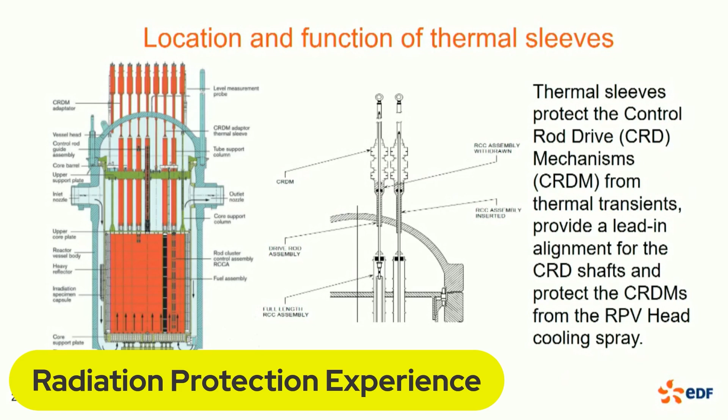So for your benefit and for mine, what is a thermal sleeve? This is a schematic of a standard PWR. Sizewell is an American-designed Westinghouse 4-loop PWR.

The thermal sleeves sit just at the top here, these funnel-shaped objects. They provide a lead-in during reactor reassembly for the control rod drive shafts, and they protect the control rod drive mechanisms from thermal transients as those control rods are retracted and placed into the core, and if the reactor head spray is ever used.

To get a bit of context, during an outage, the head of a PWR needs to be removed, with the bolting flanges across just above that green section there. The idea is, what's supposed to happen is you take the head off, put it on a storage stand, and everything you see red above there is supposed to go with the reactor head, then it goes and sits on a stand.

The next stage is the green section there, which we call the upper internals. That contains support columns and other support plates for the drive mechanism, for the control rods. That also needs to be removed so we can finally access the fuel underneath for refueling. Then reactor reassembly is the reverse process.

So those funnels on the end of the guide tubes, the thermal sleeves, provide a lead-in for those vertical sections as they re-enter the core.

During construction, those thermal sleeves are put in from the top. You can see here there are nuclear safety significant welds, so basically that's the pressure boundary up here. They're installed before those welds are finished, and they sit in the adapter tubes quite happily.

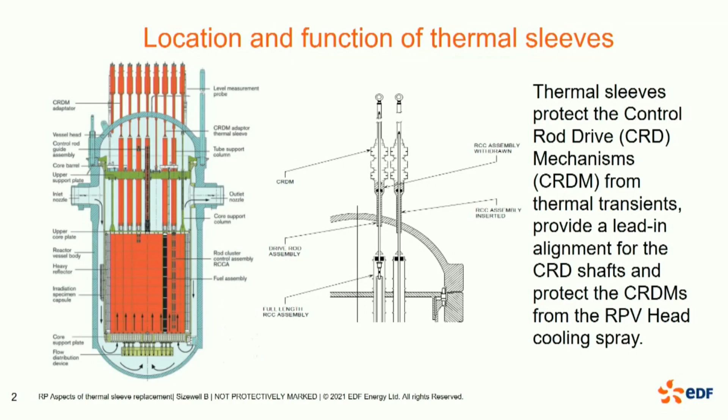So schematics are one thing, but just to give you a sense of scale, that's a reactor pressure vessel head under construction. And those are the tubes I was telling you about that are welded afterwards once the thermal sleeves are installed. You don't really get a sense of scale.

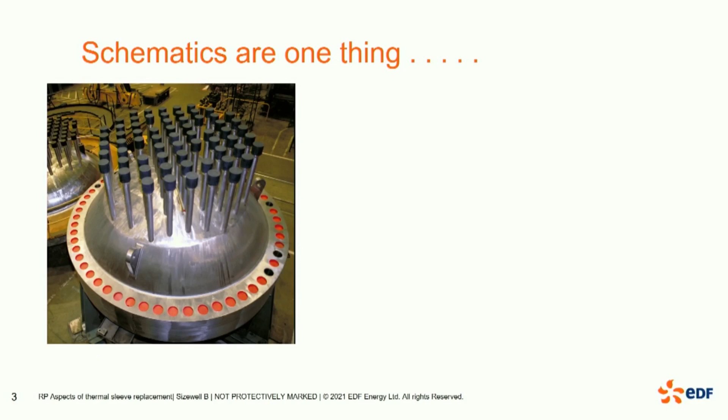So on the right there is Sizewell's head on the stand. You can see the bolting ring here is the same bolting ring. Once all of the gubbins, if you like, are installed in the head, it's a very large structure.

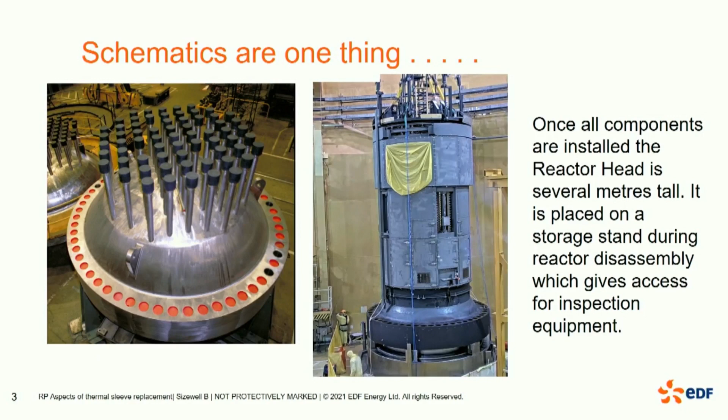And it's placed on a storage stand, which has an entrance door for inspections. But we don't routinely go under there for reasons that you'll see in a minute.

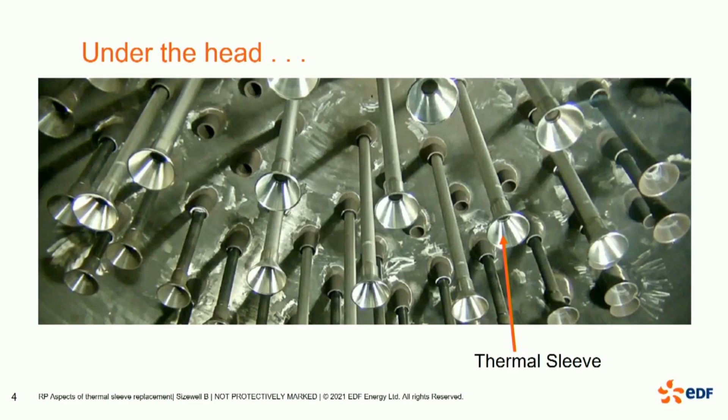Underneath the head, so that's a view. If you do crawl underneath the head and look up, you see the thermal sleeves, and you see the adapter tubes that the thermal sleeves sit in.

This is what happened when we lifted the head last outage. It's very hard to see, I appreciate that, but you can just about make out there the funnel-shaped thermal sleeve sitting on the upper internals after the head was removed.

Immediately we saw that, we knew we had a big problem, because that's not supposed to be there. It's supposed to go with the head and stay on the head. So we knew straight away we had to at least recover that one, and we had to understand what had happened.

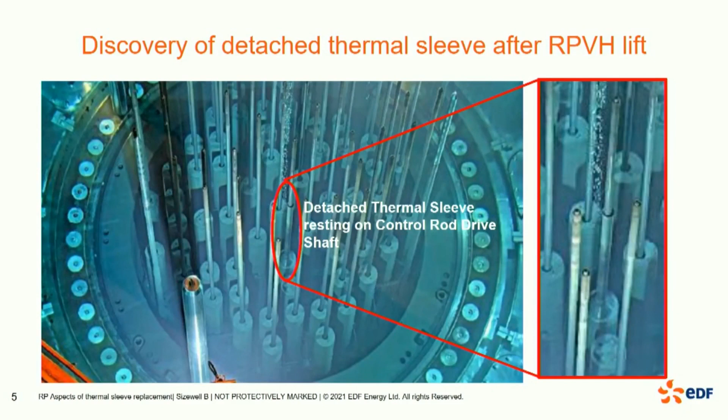Now, thermal sleeve detachment is a known phenomenon with PWRs. But for reasons I'll get into in a minute, we didn't expect it to happen yet. So what had actually happened?

Well, the thermal sleeve sits in the adapter tube like that. And I don't know about you, when I first saw that, I thought that's not a very good design, because the sharp edges of the thermal sleeve are resting on that ledge of the adapter tube. And what happens, because they're just sat there with a friction fit essentially, is they move as reactor coolant is circulating.

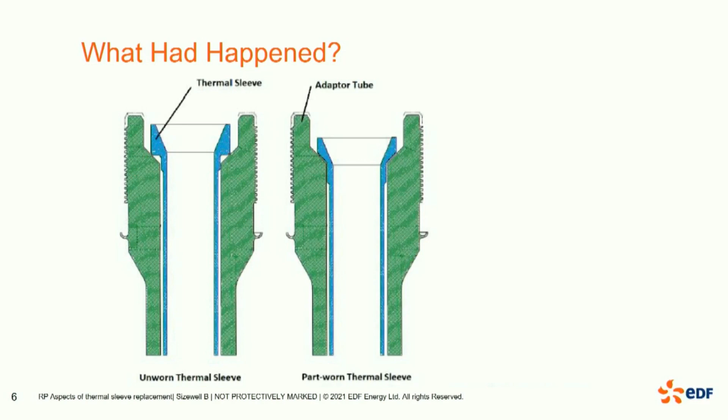The thermal sleeves will rattle around, and they will begin to wear themselves down. And as they wear, they drop through the adapter tube. And you can see there, if you keep going straight up, you end up with a detached thermal sleeve and a remnant ring remaining in the adapter tube at the top.

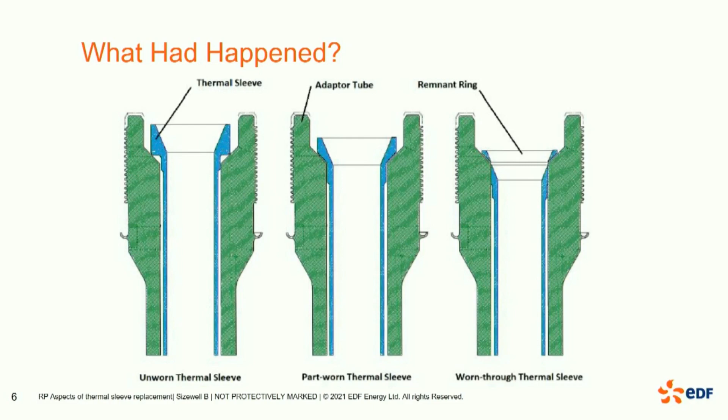So the challenge is, if that happens, the thermal sleeve will just pull out, but the remnant ring is still stuck at the top. So as I said, we knew this was a phenomenon that happened on PWRs, but there's an interesting...

If you just Google it, there's an interesting American study by the NRC that looked at thermal sleeves and the wear rates, and they said that the mean time to failure for the first failure was over 50 years for a PWR, with less than a 2% chance of a failure within 25 years.

Now, Sizewell B's head was replaced in 2006 for other reasons, I think as a result of the Davis-Besse incident, and it had less than 15 full power years because of the outages that happen every 18 months, that last a few months.

It hadn't had a long time basically in service, but there was some evidence from the French fleet, the PWR fleet, that the wear rates were slightly higher. Sizewell was an American design.

So to be cautious, we decided, ironically, that during that very outage we were going to do laser scanning under the head of the thermal sleeves to determine how far they'd worn already. So you can imagine our surprise when we took the head off and one was already out. We were expecting to do a study and say, well, they've worn a bit, but it's only been 15 years.

So when we did that scanning, which we were all set up to do anyway, we found another 15 that were unacceptably worn, either on the verge of failure, or there were actually 1 or 2 that had already failed, but that were held in by friction.

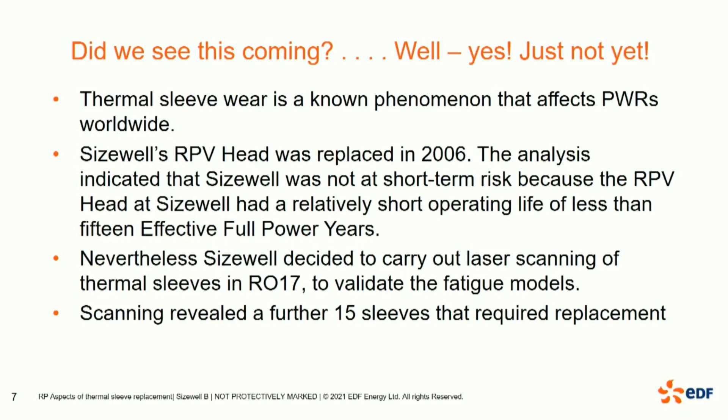So how do we fix this? Well, going back to my first question, in RP we always like to ask, do we really need to do anything? Because it's not going to be very nice if we have to. So my first question was, really, do we need to do anything? Can we operate without them? But nuclear safety being the overriding priority, the answer quickly came back: no, you can't. You need them. So then we had 2 options.

The early analysis of both those methods predicted about 140 millisieverts of collected dose either way. But the top-down approach needed a very, very long time, months longer than the underneath approach, and it required cutting these welds, which are nuclear safety significant and would have required a lot of NDT etc. afterwards. And to give you a bit of context, every day that Sizewell is off, in lost generation, is over £1 million.

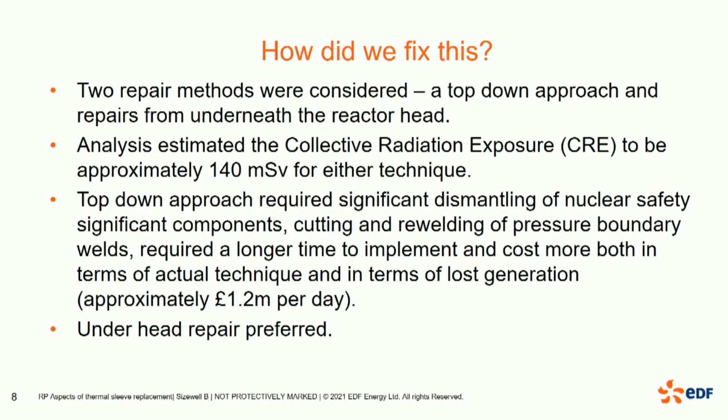So when the analysis was done, the cost-benefit analysis etc., the cost for the underhead repair was about half of the top-down approach, and for the top-down approach it would be over £100 million to repair. So underhead repair was preferred.

So that's what we plan to do. Westinghouse have a technique for doing this because it is a known phenomenon. They have done it in the States, and I think recently in South Korea. And that involved what we call electrical discharge machining.

I'm not an expert on that, so don't ask me too many questions about electrical discharge machining. Again, Google it, because that's what I did. High discharge current basically can cut through the stainless steel of the thermal sleeve. And like I said, that remnant ring that could remain would have to be broken up.

Or if a sleeve hadn't failed already, we had to make 3 vertical cuts and 3 horizontal cuts to leave us with a detached thermal sleeve and some remnants that we could then remotely grab with some tools. Then those adapter tubes needed to be flushed and inspected, and then a new compressible thermal sleeve is installed.

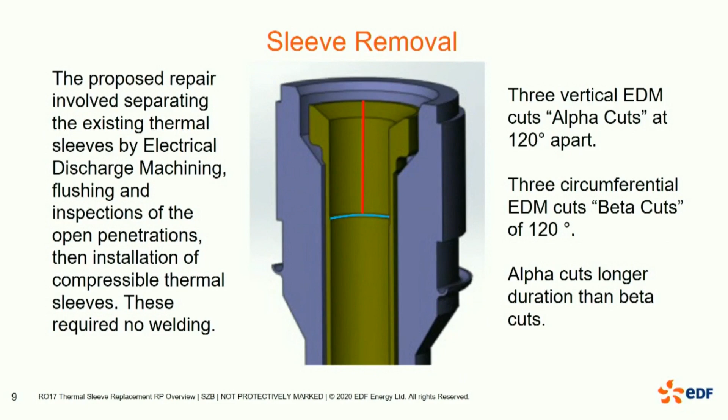So compressible thermal sleeves are essentially the trumpet end cut into sections and held closed by compression. I can't show you the actual mechanism that's used because it's proprietary technology, but basically it's inserted compressed, it gets up to the top of the housing, and then the compression is released and the petals spread out like a flower, and then it sits where the original thermal sleeve sat.

And full-scale deflection on swabs that we had to measure in terms of dose rate because the instruments were going full scale. I say full scale, but just to give you context, 2,000 counts per second on the instruments being used was full scale.

So you can imagine that any project that goes on for a long time, everybody starts to come up with names for things to help time go by a bit quicker. So these became known variously as crusty cornets, dodgy didgeridoos, and I think my personal favorite was honking horns, that we had to go and deal with. So again, we got 15 out in the end.

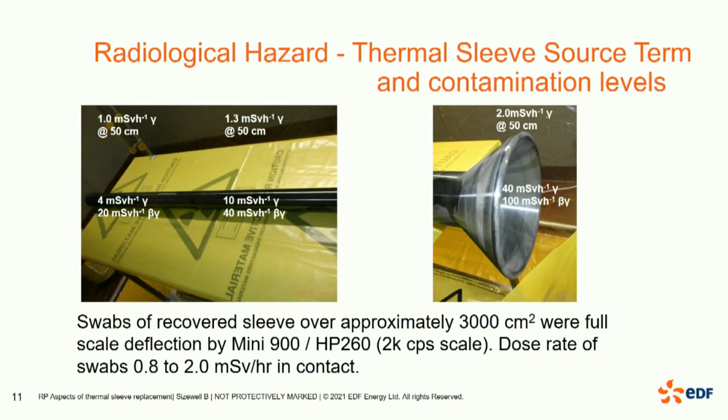One of my colleagues went under as an initial jump to determine the radiation gradient underneath the head, and it's quite significant. At crouching level, it's 5 millisieverts per hour, but directly underneath where the thermal sleeves are, it's 20 millisieverts per hour, give or take.

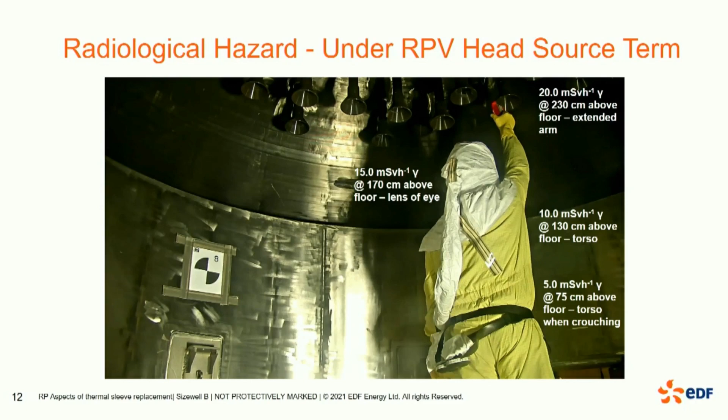So we had an idea, and then of course we were concerned with eye dose because, as most of us know, the limit changed recently, and because of that difference in gradient of say a meter or half a meter, there was this concern that we would exceed eye dose limits. So we had to manage the whole body doses and their eye dose limits.

We also had to worry about airborne activity generated during aggressive tasks such as the cutting. As it turned out, the cutting uses water as a coolant fluid, so we had to control that. It helped keep airborne activity down a bit because it was essentially a wet cutting technique.

Then we had to worry about the handling and storage of thermal sleeves. There's the old adage in DIY, you measure twice and you cut once. In something like this, once something's been removed, it gets measured 17,000 times.

20,000 photos are taken by every engineer that you come across, despite RP saying, do you really need to take more photos? The answer is always yes. It's nuclear safety significant, we must take a photo, which is understandable.

But you did feel after many shifts, this is getting a bit excessive. Every sleeve that came out was examined and a significant amount of dose was accrued.

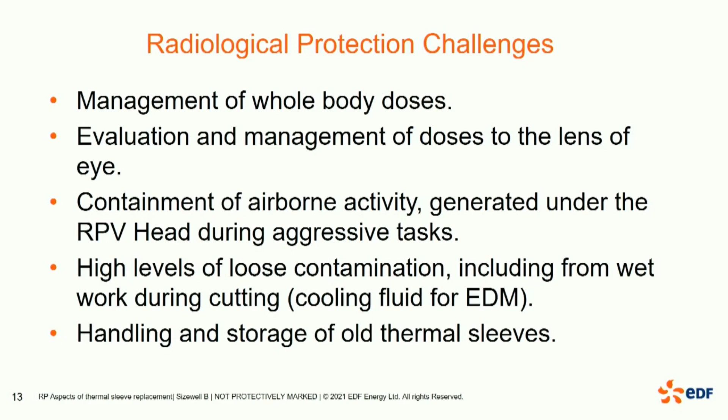So how do we control the dose? Westinghouse, as soon as they were working up the tender for doing this process, did practice runs. They had a lot of training on rigs at their facility in the States. RP couldn't go because of COVID, so we were stuck in the UK with teleconferences, video conferences, etc., to discuss techniques and what support they would need from us.

So where remote monitoring comes in is for the use of those individuals under the head. We needed to have teledosimetry of those individuals. We needed to be able to talk to them because we had cameras under the head, and cameras to look at behaviors are pretty useless if you can't tell the person they're doing something wrong. So you need to have comms and the cameras. That proved really handy in the end.

You'll see a video in a minute of a jump underneath the head to install the sleeve, whilst people were waiting outside the head. A lot of this stuff, like the cuts, was set up and then they could run automatically, and then they'd go in and rotate for the next cut. So there was a lot of waiting around, but waiting around near a dosy reactor head. So we had to think about some shadow shielding for those people waiting outside.

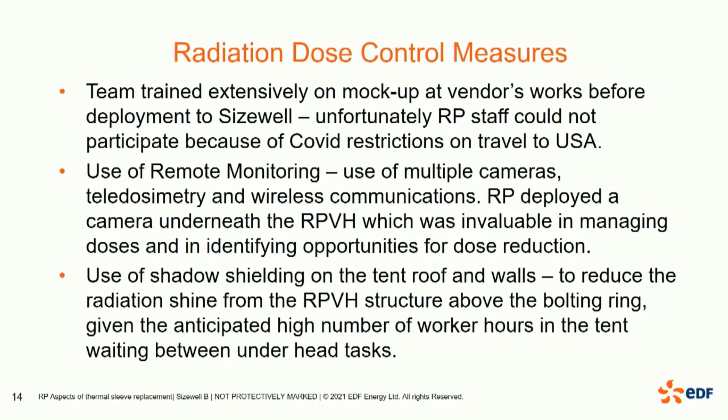Management of eye dose, as I said, was a concern. Initially we used eye dose TLDs positioned inside radiological RPE, respiratory protective equipment. And of course, initially, the first few jumps, we immediately took those for analysis because we didn't have a good handle. We had the dose rate measurements we'd done under the head with handheld instruments, but we didn't have a good handle yet on how that would translate exactly to whole body doses and eye doses.

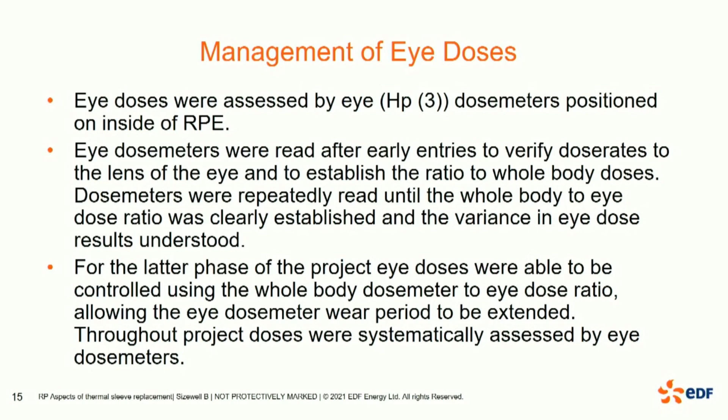So we were studying the doses as they came in to try and determine a ratio that we could work with. Later on, once we had established that ratio, we could give people eye dosemeters and tell them to keep them for a month, rather than having to do every jump and sending them off for analysis. And I remember the head of RP being very nervous, waiting for those results to come through because of the eye dose limits.

So anyone who's worked on a reactor, whether it's operational or decommissioning, knows reactor tape, a tape that a site uses, which essentially holds up nearly the entire station. And whenever you're doing a task like this, the rolls of plastic come out. In terms of environmental concerns, this isn't best, because we did try and decontaminate the plastic as much as possible before we disposed of it.

But we had to come up with the design of a tent around the storage stand. So you can just see that the head is sitting on the storage stand there, and we had to put some shadow shielding on top of the structure. We worked with the scaffolders to build a suitable tent. I use the word tent kind of loosely because it doesn't look great, but it worked very well. And then this is an access.

This is the head stand, and this is the access into the head. Obviously everyone's sign blind, but we do try our best with signs to warn of the hazard. That's under the head, that's where you enter the head.

Because it was a very large tent, we needed to worry about extracts to keep things controlled. You see on the reactor head there's a gap between the head and the stand, which you can't do a lot about. You wouldn't put a reactor tape on the flange of the reactor head because of foreign material concerns. So we had to make sure our inflow was sufficient, that we were drawing air in through the reactor head and not letting anything escape. We also had to make sure there was suitable extract placed in the undressing area and things like that, so where people were waiting, airborne levels were kept low enough, although they were wearing RPE the entire time they were inside the tented area.

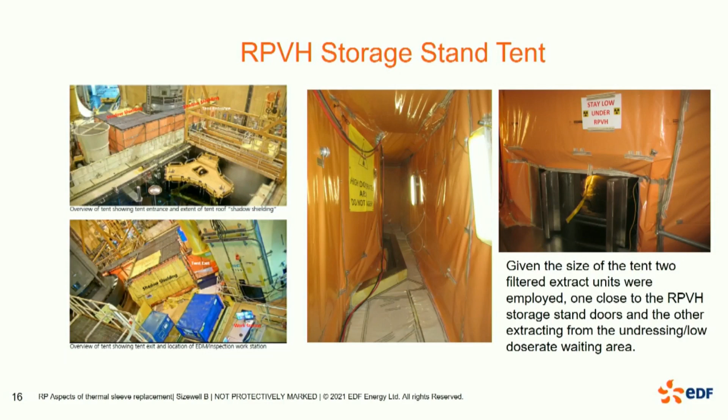So that's just a kind of top-down view.

This became, as I said, things got nicknames. This became Neil's tent because one of the newer engineers, who used to be an RP technician, designed most of the tent for us. So it's his fault there's a smiley face down there because I didn't do that. I was assuming everyone would get out clean and happy when they'd finished. They got out clean for the majority, but I'm not sure about happy after you've been in a power hood for several hours.

So it gives you an idea of scale, that's the head. Cables for teledosimetry etc. had to be run from remote locations. A bit of context is that Sizewell, although it's the newest operational station in the UK, was designed in the 80s and constructed in the 90s. In containment, there are 2 LAN ports for every bit of data that needs to come out of containment, so that's a challenge, like having a house with only 2 electrical sockets. 2 LAN points in the containment meant we had trailing sockets upon trailing sockets of LAN to try and get data out, which does work, but it's a nightmare to set up.

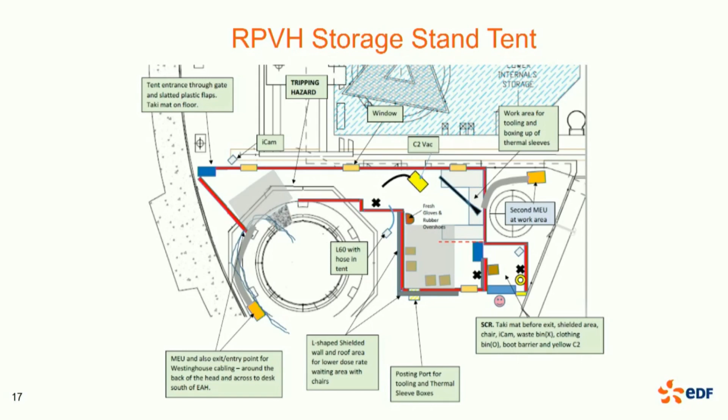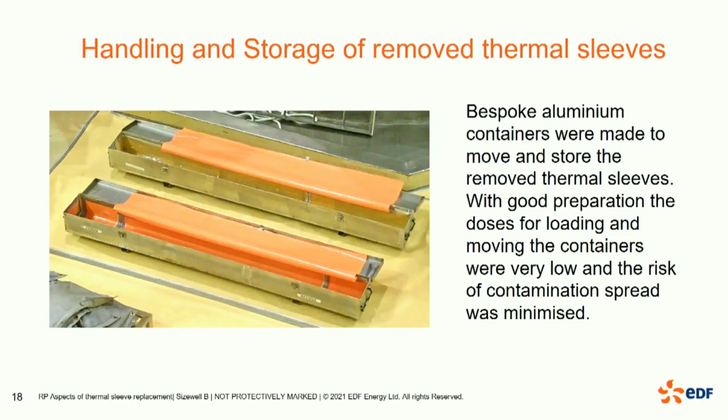These are Bob's boxes. My other colleague Bob went down to a local manufacturer, a metal fabricator, and designed himself a storage box. We needed to take these thermal sleeves out of the building and store them for eventual disposal. So we had these boxes designed, and we did a lot of trial runs with dummy weights and dummy stainless steel pipes, so that by the time we came to handle these, we were very practiced at getting them out of the area quickly and across to the building where they were going to be stored. That made sure the risk of contamination spread was very low as well.

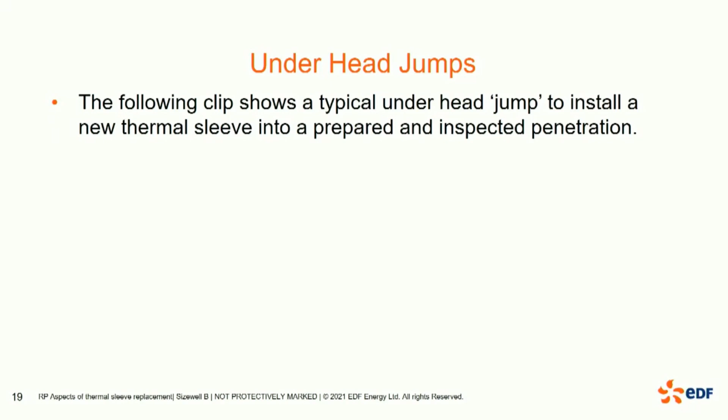So very quickly, this is just a one-minute video showing a jump to install a sleeve under the head. In this video, everything has been removed from the penetration, it's been cleaned, inspected, and it's ready for installation.

I wish they moved that fast in real life. It's about double speed, this.

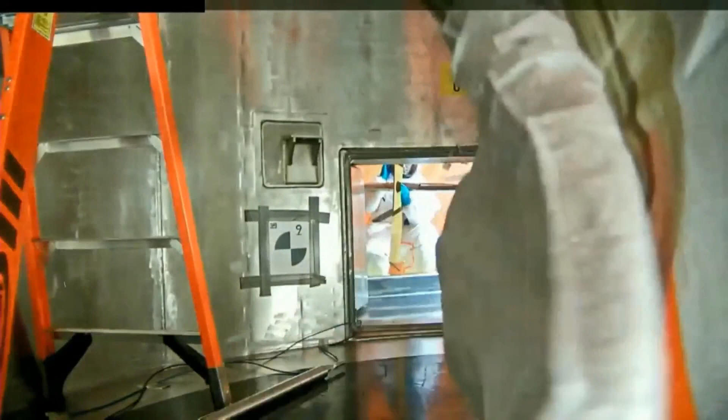Later on, that platform took a while to orientate, and that's a bit of the OPEX we'll discuss later. But there's the thermal sleeve with the compression mechanism, which I can't zoom in on.

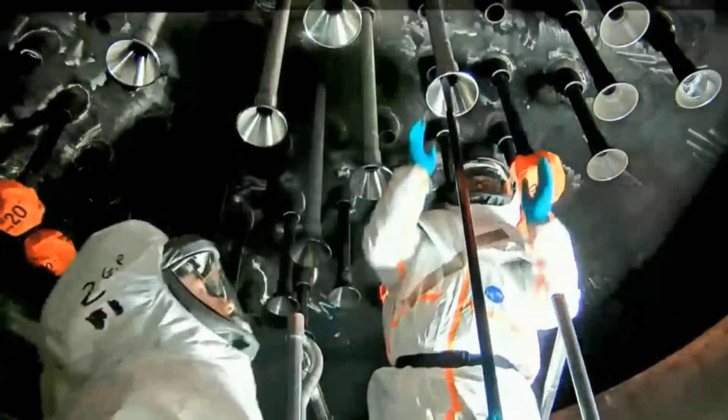So then they're just rotating it to make sure it's fitted correctly inside the adapter tube. And that was it, so that's how quick we got to be with under-head jumps. But as you'll see later on, that jump would have given those 2 people on the order of a couple hundred microsieverts for that one jump, and they would do multiple jumps.

So this is the graph of the doses we did for each sleeve. It is kind of in order, but the outlier here, this one F10, is the one that was recovered from the upper internals. So it didn't have a lot of cutting tasks etc., but it had a lot more inspection dose.

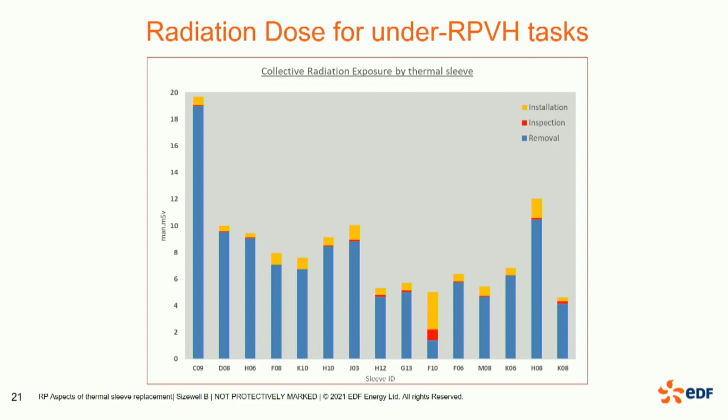Surprise, surprise. So we did kind of get better, but there were issues along the way with stuck sleeves. Those pieces of remnant that stay up there would sometimes go play hideaway, so the cameras couldn't find them, and it took a while to make sure we had everything. But overall, the doses did come down, and we were quite pleased with our performance by the end.

So that's a graph that every physicist would love to see - the correlation between eye dose and whole body dose. When we were plotting that, we couldn't really believe how accurately it came out as 2 to 1. There's the odd outlier here, and we think there are 2 things that could have happened.

Either that individual spent a lot of time sitting on a chair outside of the head and made all of his mates do the jumps, or he forgot to wear his eye dose meter. We never actually got to the bottom of which one it was, but that's what we believe is that outlier there. But everything else, more or less, there's a nice trend line.

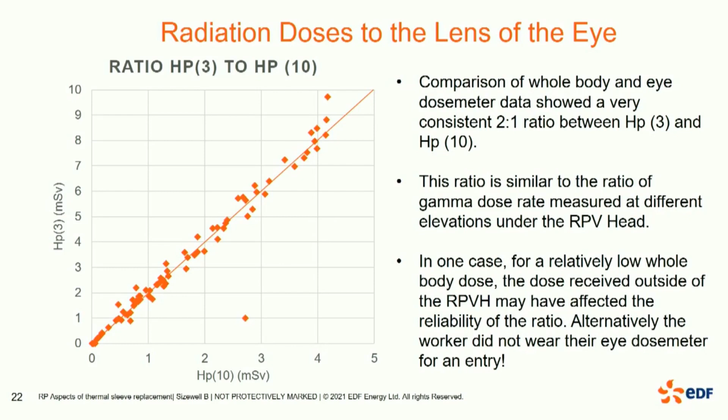We could say 2 to 1, so we could start controlling eye dose by controlling whole body dose. And we did it that way, and it works extremely well. It kind of correlated with the dose rates we were seeing under the head with a handheld instrument anyway.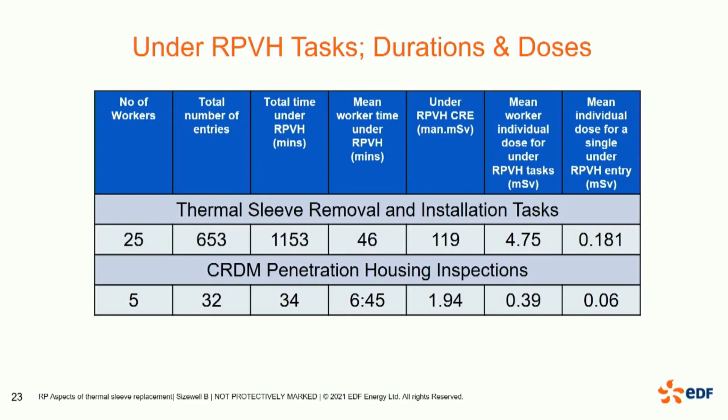So that's a summary of the tasks. They're separated into the inspection team and the installation team because the inspection team were a separate group of people. The thermal sleeve removal and installation tasks, based on the number of minutes they were on average spending, the dose rate was essentially about 100 microsieverts per minute that they were under the head. The mean for a jump was 180.

I don't like having 181 because that's too precise for me, but very high doses, obviously. Overall, we were aiming for collective radiation exposure of 175 millisieverts. That was a bit more than the initial 140 because that was after we considered all of the inspections that were going to be required of the removed sleeves. We came in at 135.

Maximum dose we were shooting for was 6 for the whole body, and we got 5.9. Maximum lens to the eye was 15, and we got 12.2.

So number of PCEs, I don't know why we didn't just put 0 rather than not applicable. We don't have a goal. I think we should have had a 'we don't want to get anyone contaminated' goal, but we got 3 people end up becoming contaminated. Now, this talk was written for an American audience, and the EPRI level 1, for those of you who aren't familiar, is roughly 100 counts by a pancake Geiger.

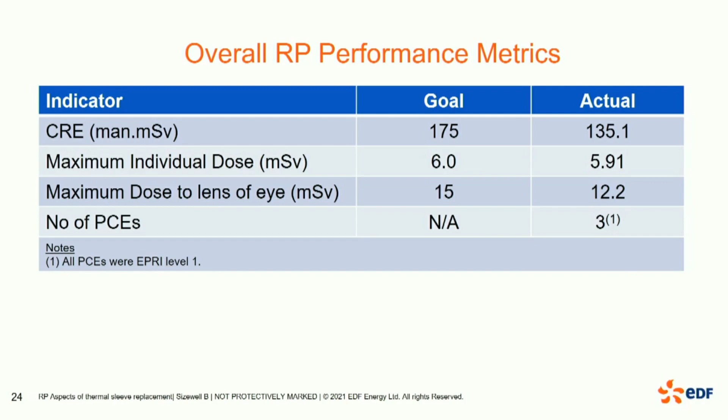Anything less than that is a level 1 PCE. So all 3 personal contamination events we had were EPRI level 1, and we believe every single one was due to undressing behaviors when they took the powered hoods off. They cross-contaminated their heads and things like that. But overall, given the number of jumps and the number of people, we were pretty pleased with that performance.